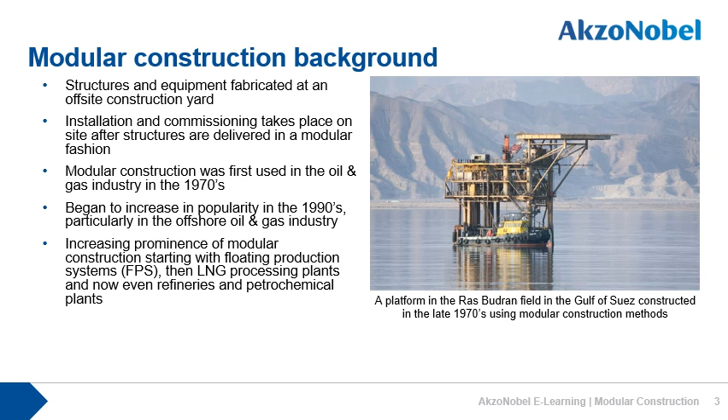Here we'll take a quick look at the pros and cons of modular construction. On the plus side, modular construction results in more reliable access and efficient use of skilled manpower. This is particularly critical in the oil and gas industry, where the pool of experienced tradespeople, such as welders and electricians, can be limited. With a stick-built approach, which is the other option to modular construction, securing skilled workforce can often inflate costs due to the need to provide travel allowances and housing accommodations on site.

In many instances, an off-site module fabrication facility can be selected in a region or in a country where labor supply and demand is more balanced, and hence the cost of skilled manpower is lower. Shorter development schedules. Modularized construction can reduce a project's development schedule, and it does so in a number of different ways. First, by assembling modules using prefabricated parts off-site in a designated facility, the chance of running into delays caused by weather or other environmentally related factors on-site is minimized.

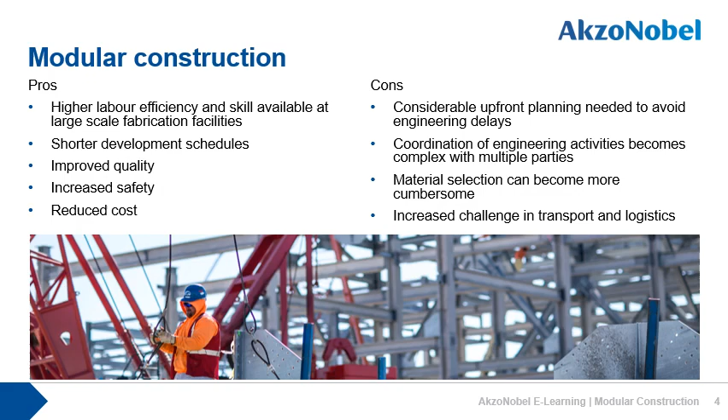These shortcomings, important as they are, can to a large extent be mitigated by making smart choices during engineering and design. And in today's webinar, we will cover how we think certain choices in coatings or paint specifications for modular construction projects can reduce the impact of some of these drawbacks just discussed. In this section, we will talk about the aspects of modular construction that lead to coating system specification complexity.

As we discussed in the previous section, one significant downside of modular construction is the increase in engineering complexity. A significant component of this is coating system specification complexity. This is due to the fact that modern modular projects involve multiple engineering locations and multiple construction sites. They typically also involve complex supply chains with potentially hundreds of vendors, and all of this necessitates close monitoring and control. All of this increased complexity leads to, of course, increased cost, and this is due to multiple factors.

First, an increase in complexity increases the chance of human error. Second, there is a need for greater inspection and monitoring, and you need to have teams to do this in all key locations during construction and installation. Third, a small error in engineering at the beginning of the project can have a ripple effect down the line during construction, and due to the complex nature of these projects, this can have a massive impact. In the next few slides, we will delve further into the source of coating system complexity and then think about how this might be mitigated by designing the right coating specification.

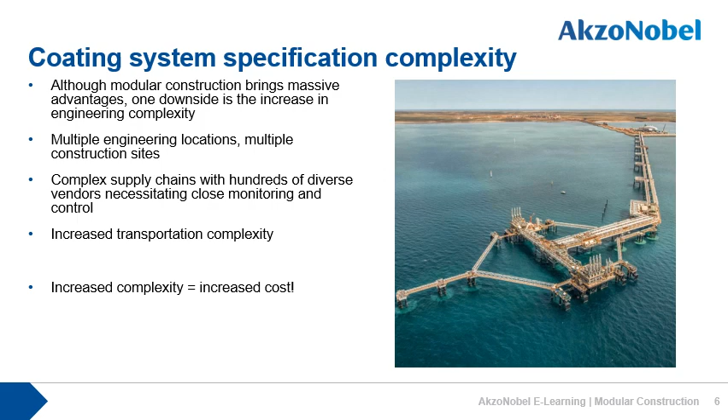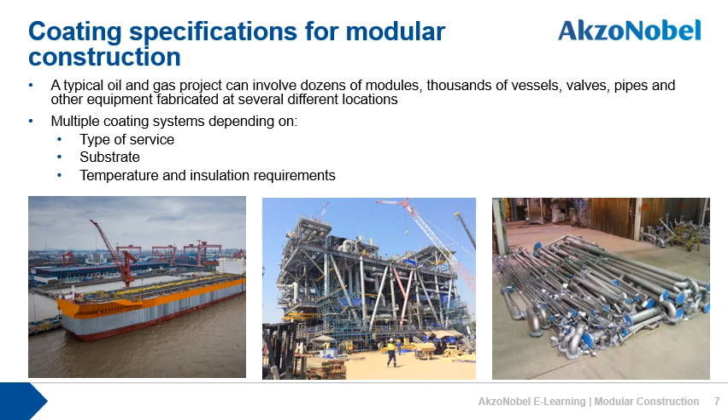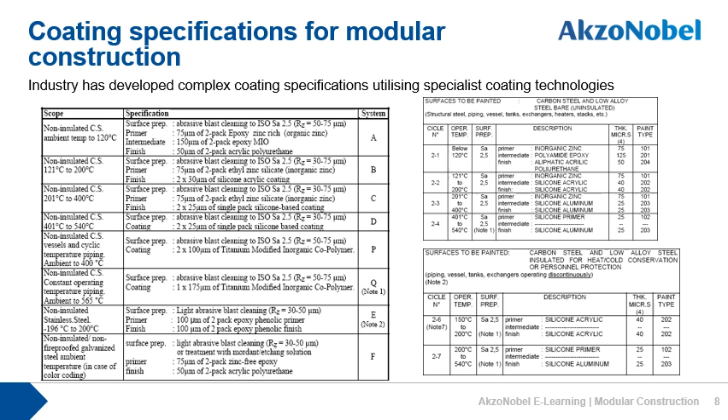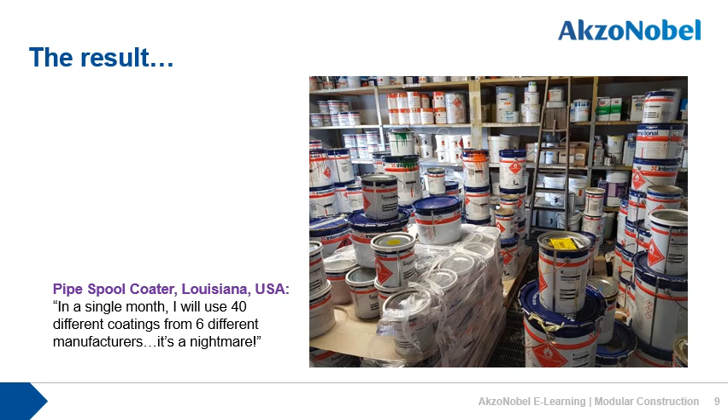The result, it's a paint shop manager's nightmare. And as one of our customers described it, in a single month, I will use 40 different coatings from 6 different manufacturers. It's a nightmare. Those were their words. Complexity in specification can also lead to errors during construction. Bulk supplied items such as valves sometimes arrive at the fabrication site with the incorrect coating for the final operating environment, which inevitably then leads to costly rework.

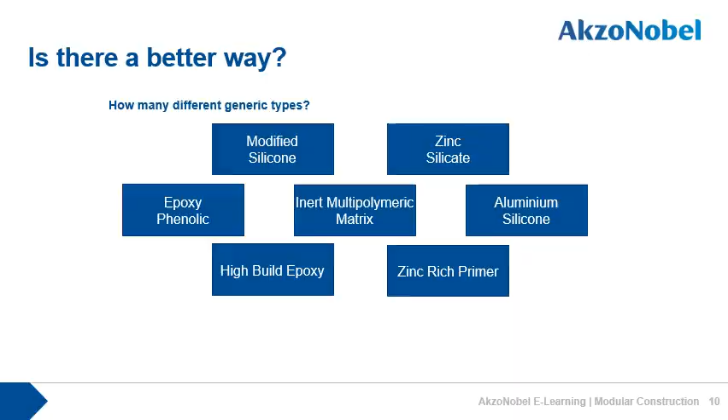So the question is, is there a better way to do things? Given the complexity in construction process and the operating environment, can we design coating specifications that are simpler, yet give us the flexibility in end use and the durability and performance required? No prizes for guessing the answer there. Before we get to what we believe could be the solution, I'll take you through a brief introduction on how we arrived at this from our experience in modular construction.

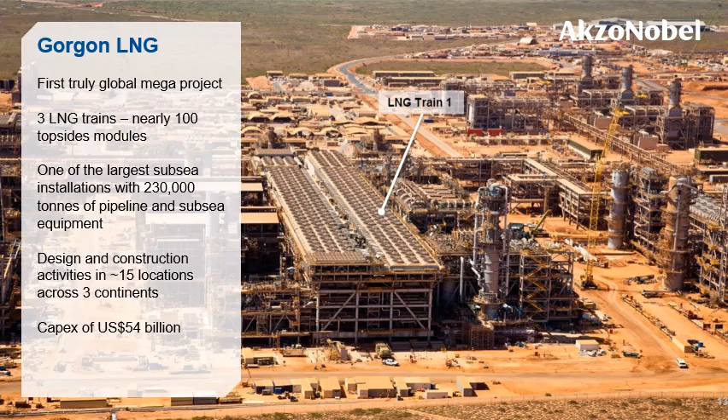As mentioned in the previous slide, the Gorgon project was at a global scale and scope that we had never experienced before in oil and gas. The key front-end engineering work took place in London and in Houston. There was fabrication and painting across at least 8 different locations in Europe and in Asia, which covered modules, pipes, pipe racks, valves, and vessels. And of course, those 100 modules and 230,000 tons of piping all came together in the remote Barrow Island in Northwest Australia.

This gives you a sense for the complexity involved, and this really has become the norm in recent years in modular built projects, especially in LNG. Another similar project, also in Northwest Australia, was Ichthys. And with this one, there was an additional complexity of having an offshore processing platform and FPSO added to the onshore processing facilities. Like Gorgon, it involved a massive amount of piping. In this case, it was 889 kilometers of subsea piping. In addition, it was built with a 40-year design life. And like Gorgon, AkzoNobel International Paint was the preferred supplier in all locations.

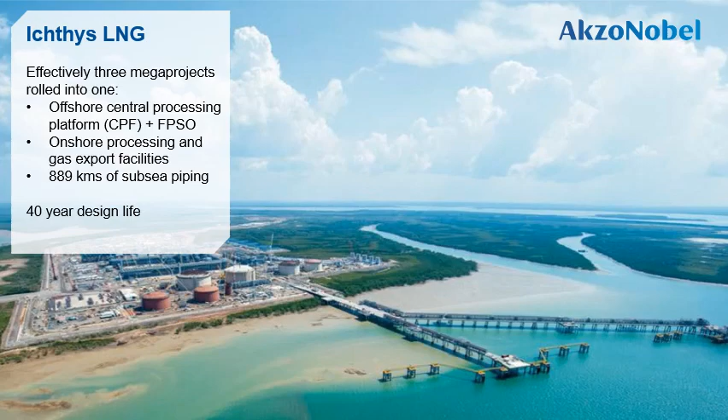The third and final example of modular built mega project that I'll use in today's webinar is the Yamal LNG project. And I've used this example to highlight the complexity in extreme environmental conditions that we sometimes face on these projects. The 800,000 tons of modules were installed in Sabetta, which is located in the Yamal Peninsula of Russia, where the winter temperatures often go below minus 40 degrees centigrade, or 40 below freezing. Added to that is the remoteness of the site, which makes it a logistical nightmare. And you can imagine how difficult it is to set up a crew to do site work in a project such as this.

So our involvement in these diverse and challenging projects has given us some key insights into coating specification design. First is that a global supply chain is an absolute must. Any coating supplier involved in these types of projects must be able to deliver paint to all the fabrication and painting locations, and of course to the site, which is often in remote locations. Many of these projects come with stringent and unique design standards, as well as environmental and regulatory challenges, all of which the coating supplier needs to be capable of catering to.

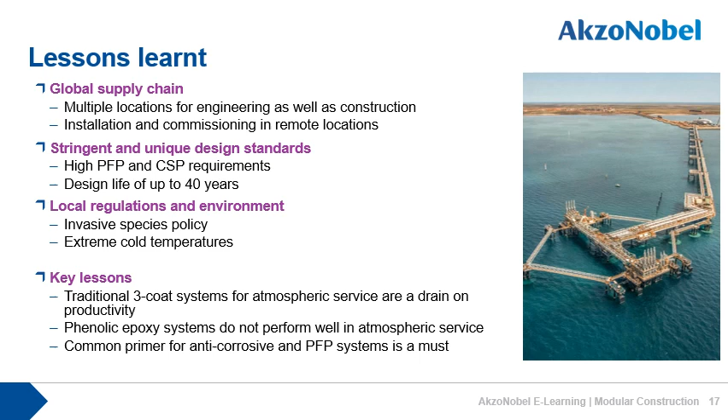We now come to our recommendations for coating system design in order to reduce specification complexity, and this revolves around our universal coatings concept. The evolution of our universal concept goes back to the 1980s when Intershield 300 was launched. It was initially intended as a universal primer for ships, which could protect the hull, ballast tanks, topsides, accommodation, and decks, all using the same product.

In the 1990s, that concept was adopted by the offshore oil and gas industry, primarily on FPSOs, which at that time were just ship hulls with some processing modules on top. And this is where Intershield 300 really started coming into its own. We then extended that same concept in the early and mid 2000s to modular build projects, such as some of the examples that you've seen previously, like Ichthys and Yamal, where Intershield 300 was used as a universal primer for both the anti-corrosive and the passive fire protection systems. Thus, we were able to break a long-held myth that zinc-rich primers were necessary to achieve long-term corrosion protection in harsh environments.

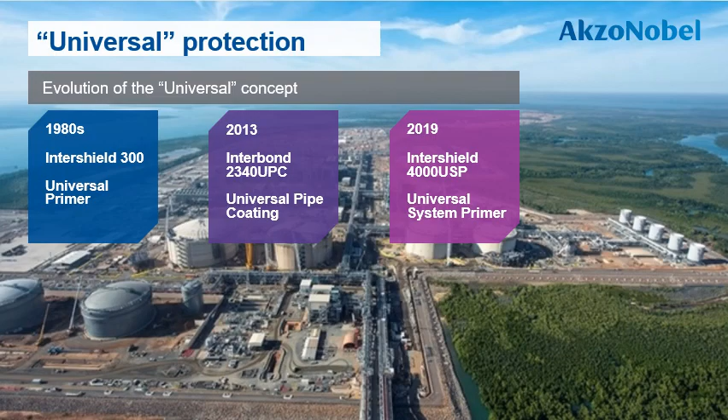We start with a deeper look into universal primers such as Intershield 300 and Intergard 7500. Now, these products can be used in multiple end uses such as atmospheric exposure, immersion, and as a primer under passive fire protection. The key attribute is that they provide as good, if not better, anti-corrosive protection than the traditional products that they replaced, such as zinc-rich primers for atmospheric end use.

The graphic on this slide shows a comparison of the complexity of the traditional specification approach, which you can see with the slightly blue background, where 6 or 7 different products were needed to do the job just for ambient temperature exposure. This is in contrast to the universal primer approach, which you see with the slightly pink background here. This is where a single primer is used, a primer such as Intershield 300 or Intergard 7500. And all you need is a polyurethane top coat over it for atmospheric or UV exposure, or in the case of a fire protection system, you apply the fire protection product directly over the universal primer. So this significantly reduces the number of products that you need to protect both structural steel as well as immersed steel.

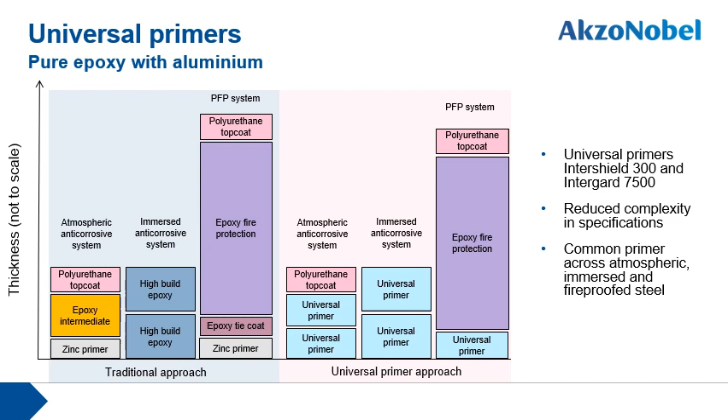In addition to the complexity reduction, which obviously reduces inventory cost and potential for human errors, there is also a massive productivity benefit in moving to this universal approach. As you can see on the graphic in this slide, using Intershield 300 or Intergard 7500 can save huge amounts of time in the paint shop, which is often a bottleneck in the project. As shown here, Intergard 7500 or Intershield 300 can be overcoated in just 4 hours compared to a typical zinc-rich epoxy that takes 8 hours at an ambient temperature of 5 degrees C. And that means you can get through 2 coats in a shift with the universal primer rather than just one if you're using a zinc-rich primer.

The effect is magnified for fireproofed areas, because the traditional approach would require an application of a tie coat, meaning that you would need more than 24 hours between the primer application and the fireproofing. In contrast, with a product such as Intergard 7500 or Intershield 300, the fireproofing can take place in the same shift as the primer application. And that saves a massive amount of time, especially in modular construction.

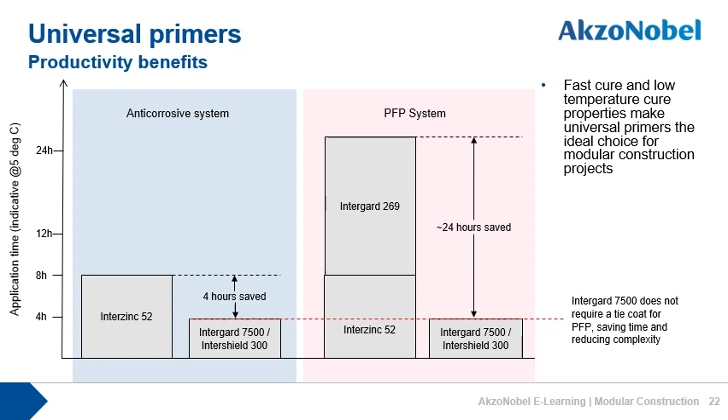Next, we come to the concept of universal pipe coatings. The name really says it all, and this is where we have just one or possibly two products which are specified on all pipes and vessels, covering the entire range of operating temperatures, insulated or atmospheric service, and different substrate materials. In our case, we have Interbond 2340, which can handle temperatures from cryogenic up to 230 degrees C or 446 Fahrenheit. Importantly, it also shows excellent performance at ambient temperatures in atmospheric exposure, and this is something that phenolic epoxies fall short of.

Interbond 1202 UPC takes it a step further, and it protects steel from cryogenic all the way to 650 centigrade or 1202 Fahrenheit, which is where the name 1202 UPC comes from. Both these products are compatible with a wide range of top coats in case there is a need for color coding and things like that.

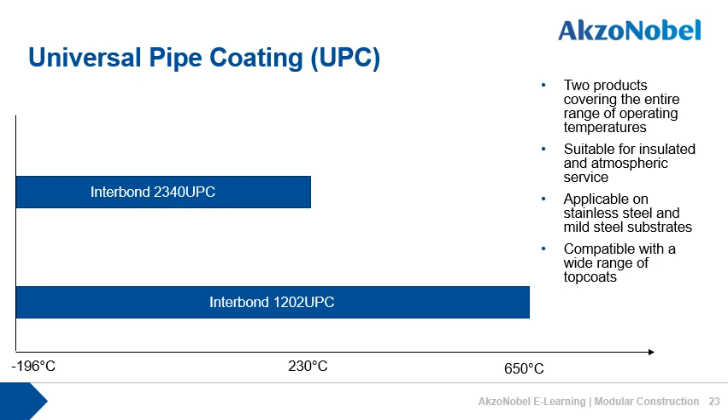So using the UPC products such as Interbond 1202 UPC, we can reduce the number of products used on high heat specifications down from 6 or 7 down to just 1 or possibly 2.

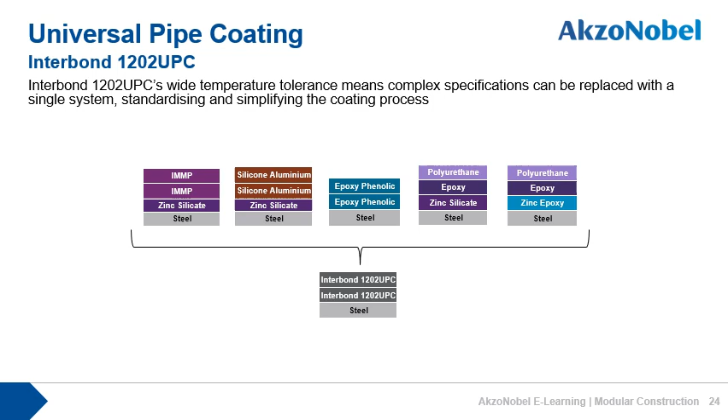With the 1202 UPC, similarly, we are able to replace multiple systems such as phenolic epoxies, traditional 3-coat zinc epoxy polyurethane, or even in some cases zinc silicates and aluminium, silicone aluminiums down to just the Interbond 1202 UPC.

Another important advantage is that Interbond 2340 UPC shows excellent corrosion protection at ambient conditions, which is something that phenolic epoxies fall short of. This could be vitally important in large modular construction projects where piping equipment can lie around in the fabrication yard for months or even years before it is shipped to the site and installed.

We've seen multiple cases where the phenolic epoxies have started to break down even before installation, and this obviously causes a huge amount of not only costly rework but potential delays to the project.

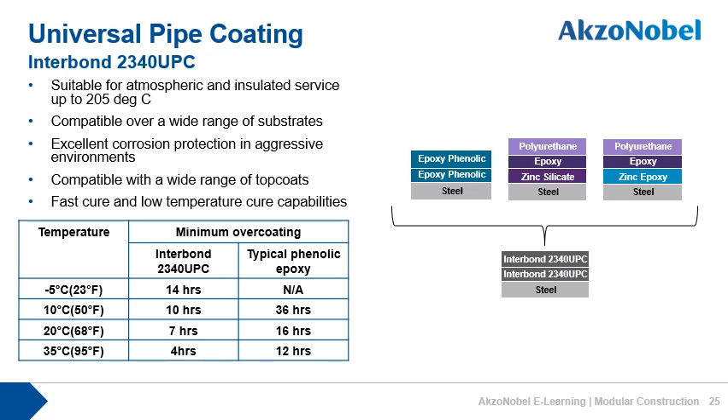Our final pillar of universal protection is the universal primer for structural steel. We have recently launched the Intershield 4000 USP, which is our universal system primer based on alkylated amine epoxy resin technology, reinforced with passivation pigments.

This is a breakthrough innovation through which we are now able to replace traditional zinc-rich primers for structural steel without compromising on durability. This leads to significant cost and time savings because Intershield 4000 USP is significantly faster curing than zinc-rich primers, and it can also be applied down to -5°C.

Importantly, it does not need a tie coat before application of a fire protection scheme, and this can lead to a significant amount of complexity reduction as well. An added benefit of this product is that it is very easy to apply and much more forgiving compared to zinc primers.

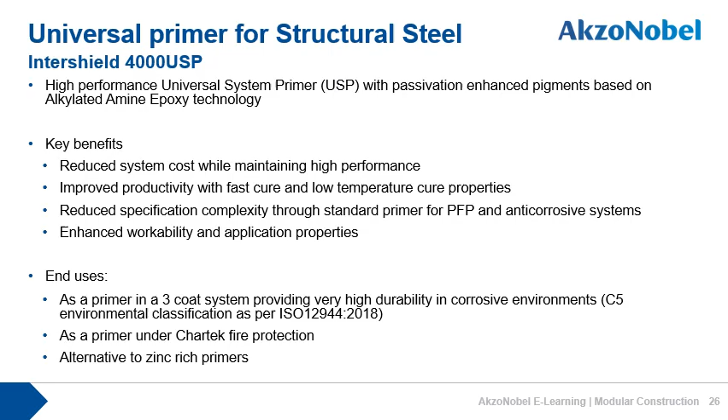With that, we are nearly at the end of today's webinar. I will now end with a quick summary of what we've covered today. So the key lessons that we've learned from past modular construction projects where we've been involved in for coating specifications is that specification simplicity is an absolute must. It increases productivity, improves quality, and reduces cost.

Productivity can be absolutely paramount in these large modular construction projects because a small delay anywhere along the construction chain can lead to huge impacts in installation and commissioning.

Robustness in performance must consider the construction phase as well as the operating phase that a product is subjected to. A good example of this is phenolic epoxies, which may be robust enough for the actual operations that they're meant for, which typically is high heat insulated service. But they are not robust enough to handle the construction process in a typical modular construction project where piping equipment is exposed to the elements for a year or 2 years before it's actually shipped to the site.